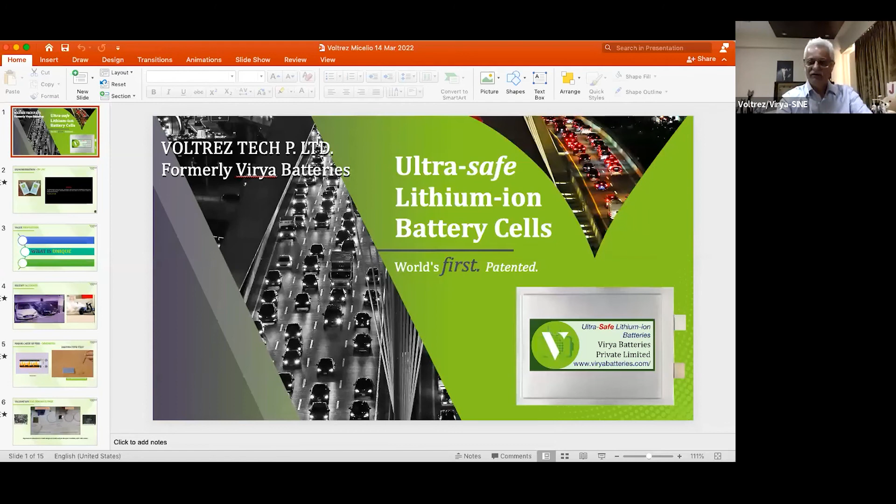So we are now Voltrez Tech, formerly we were Virya Batteries. Very recently the name has been changed, and we have a patented technology of an ultra-safe lithium-ion battery cell. This is probably one of the earliest in the world with this kind of technology.

These kinds of incidents are happening with no external abuse conditions, and dendrite could be one of the causes. Besides, other causes could be manufacturing defects, etc. Now, most of you already know, but just to briefly recap, dendrite formation basically starts when lithium ions travel from the cathode to the anode, and some of those ions deposit on the surface of the anode, turning into lithium metal called lithium plating. Once plated lithium is available, more lithium ions get attracted due to kinetic factors, and it grows into this tree-like structure, which ends up shorting between anode and cathode and creating shorts.

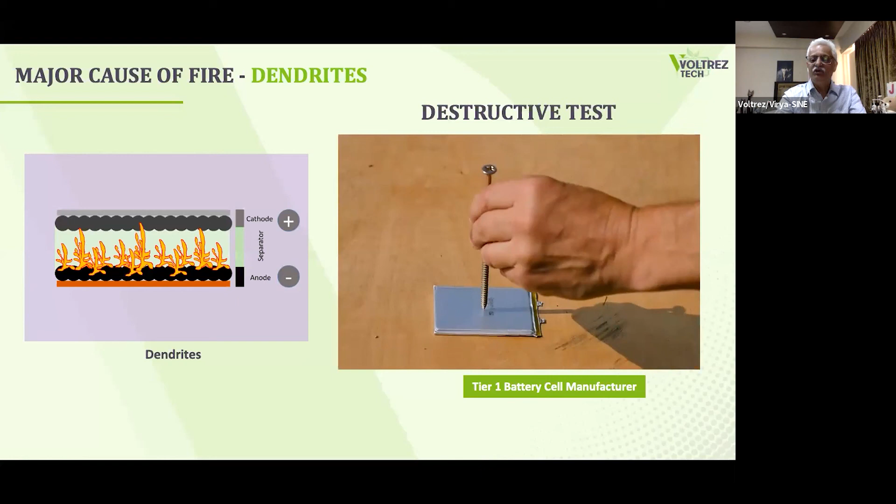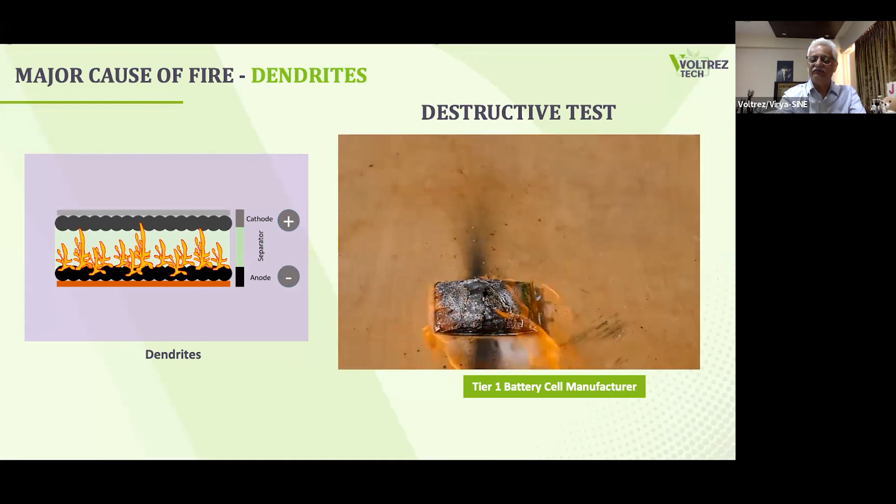All commercially available cells today are susceptible to dendrite formation, and research has been going on for decades to solve this problem. This is a video of a tier 1 cell manufacturer's cell where a small area of exposure is done, and it immediately catches fire. This confirms the presence of lithium metal inside the cell, because lithium metal reacts with humidity in the atmosphere and immediately catches fire.

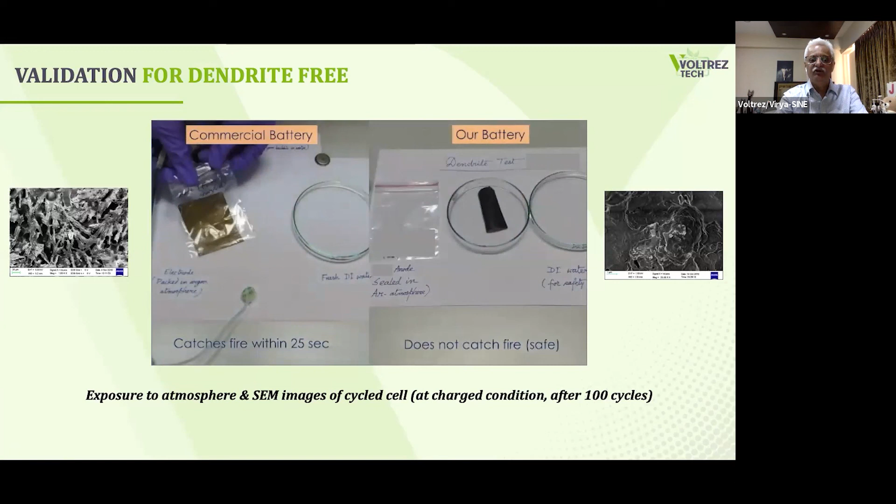The commercial anode immediately catches fire within 25 seconds, whereas in our case, we kept it on for more than 6 minutes and nothing had happened, and we just closed the test because it was not doing anything in terms of catching fire.

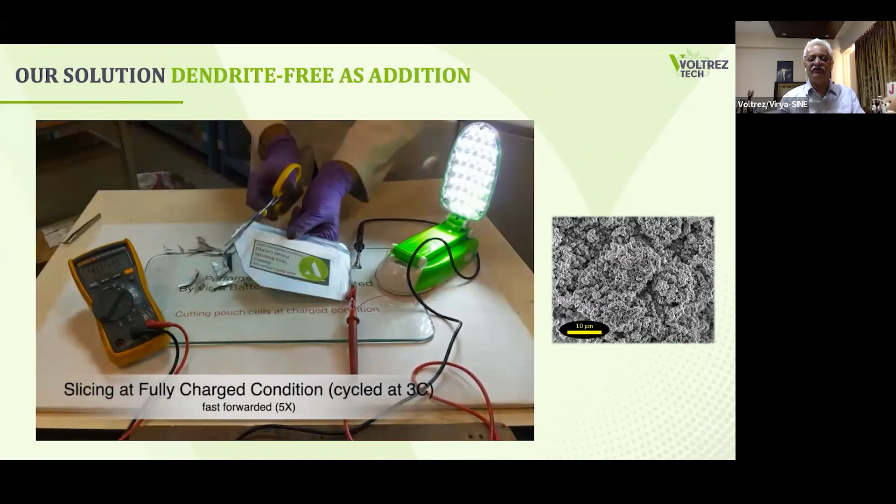This is another video where we destructively tested an abusively charged and discharged cell at 3C charging rate, and even after a large area of exposure, you can see that it demonstrates very safe behavior. Even the balance of the cell is still continuing powering the LED light.

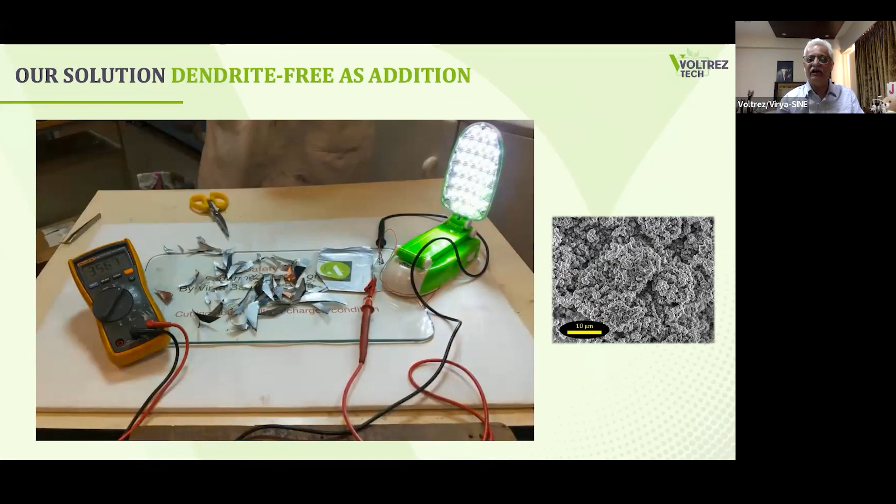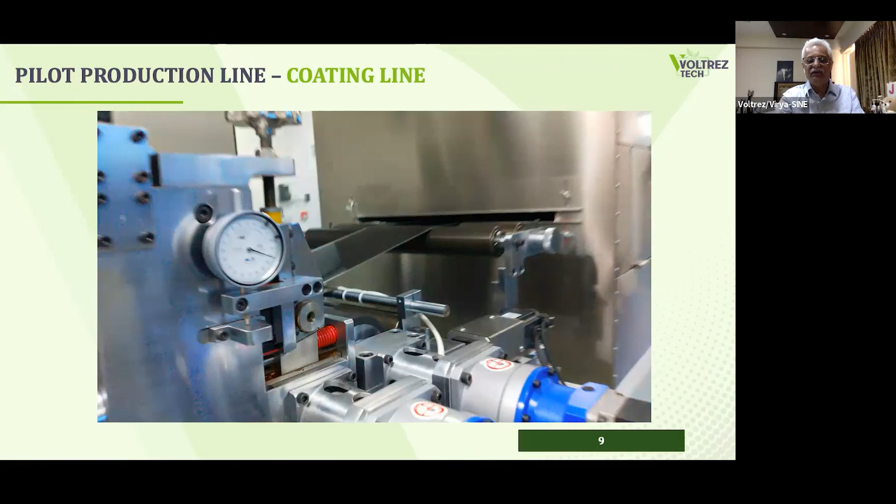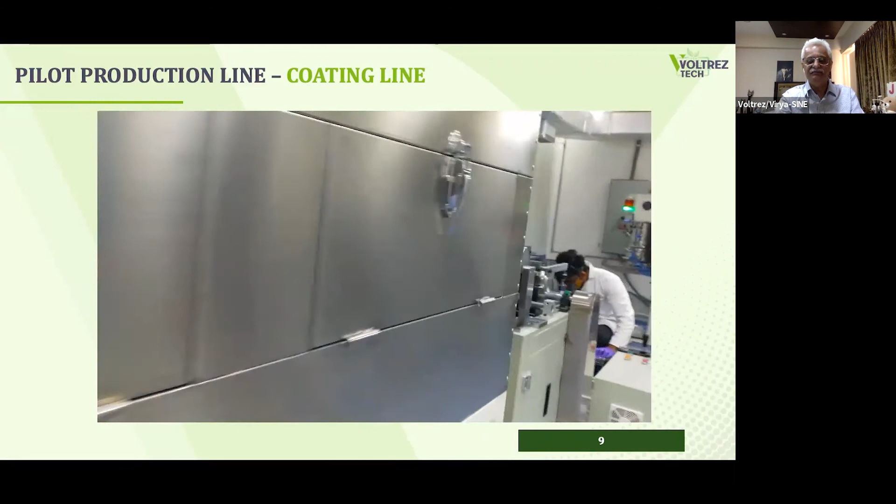This is just to show you the production line facility that we have at IIT Bombay, where we are doing the cell production. This is the coating line where we are making the electrodes. This is the heating chamber where the coated electrode is being dried. And this is where the final electrode comes out of the coating line.

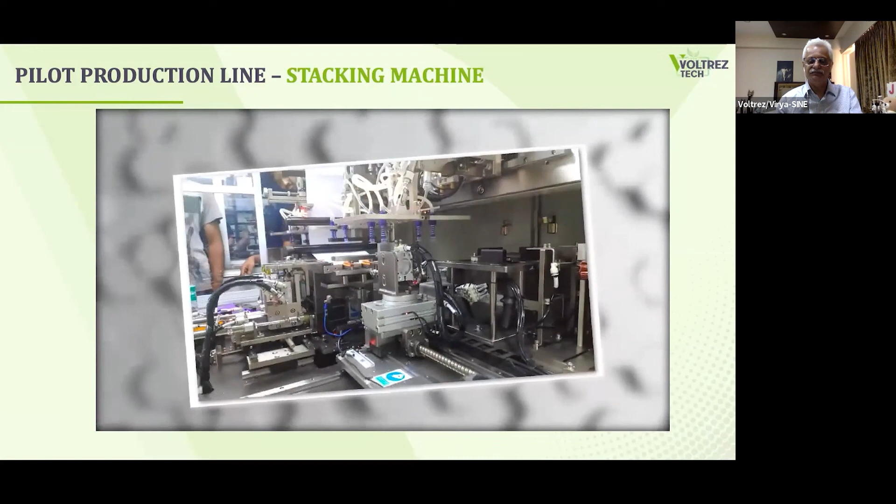These are the pouch stacking automated line where the electrodes are stacked together into a pouch format. And these are some of the cells that we have been making in this facility and doing testing and validation. And we should be out in the market, hopefully, in the next 6 to 8 months' time.

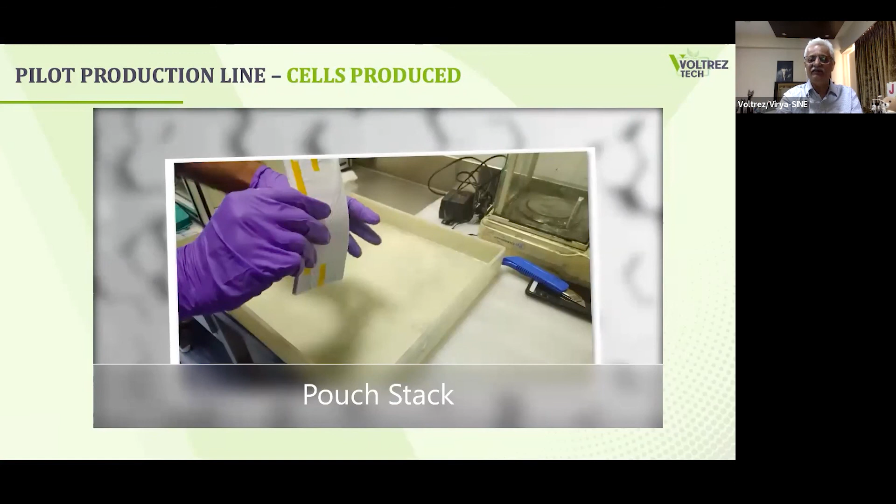In terms of product performance, currently we have reached the cycle life of around 1200 at a 1C charge discharge rate. And we are in the process of increasing the repeatability of this cell manufacturing before we go into large-scale industrial production.